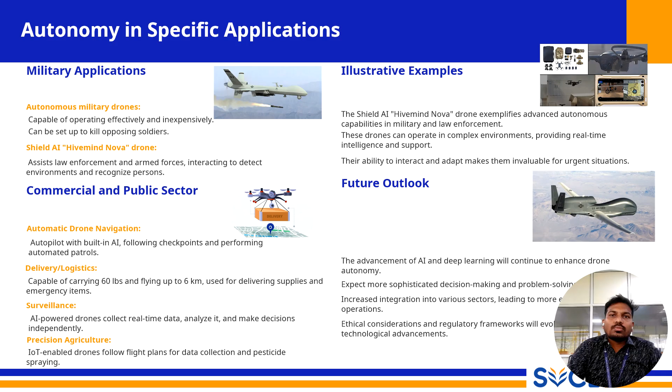Before we delve deeper into multi-rotor stabilization and flight modes, it is essential to revisit two fundamental principles of physics that make flight itself a possibility. Both fixed wing and multi-rotor rely on these core concepts to generate the lift required to overcome gravity. These are Bernoulli's principle and Newton's third law of motion.

As these wings move through the air, the air that flows over the curved top surface must travel a longer distance than the air flowing underneath. To cover the longer distance in the same amount of time, the air on the top moves faster, and according to Bernoulli's principle, the faster moving air exerts less pressure than the slower moving air below the wing. This pressure difference between the top and the bottom surface results in a net upward force, which we call lift.

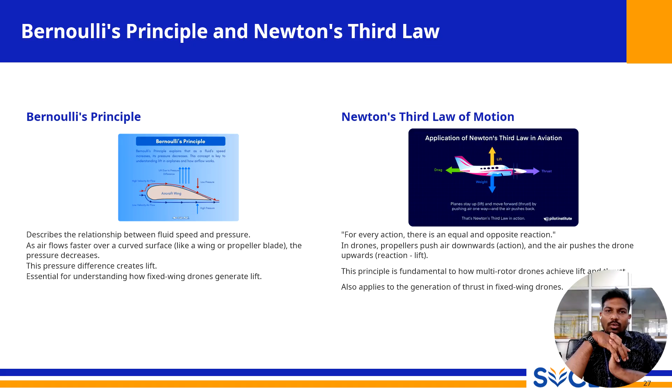It is important to note that this principle also applies to the thrust generated by fixed wing propellers, which push the air backward to propel the aircraft forward. In essence, you can think of a fixed wing drone as using the shape of the wing to create a pressure difference that pulls it into the air, while the multi-rotor drone uses its propellers to push itself up into the air. With these principles in mind, let's now look at how these are applied in the specific design of fixed wing drones.

With an understanding of the core physics, let's now apply these concepts directly to the design and operation of fixed wing drones. Unlike multi-rotors that rely on pure vertical thrust, fixed wing drones are a masterclass in aerodynamic efficiency, using their shape to manipulate airflow and achieve flight. Key to fixed wing drone flight is the shape of its wing, which is called an aerofoil.

As we discussed with Bernoulli's principle, the airfoil is designed with a curved upper surface and a flatter lower surface. This specific shape forces the air to travel faster over the top of the wing, which in turn creates low pressure above the wing compared to the higher pressure area below it. This pressure differential results in the net upward force that we call lift.

Generating lift is one thing, but controlling the aircraft is another. This is where the control surfaces come into play. These are small hinged sections on the wings and tail that manipulate the airflow to change the drone's attitude and direction. To control the drone's roll, or its side-to-side tilting, it uses ailerons located on the wings. To control the pitch, which is the nose up or down movement, it uses elevators on the horizontal part of the tail.

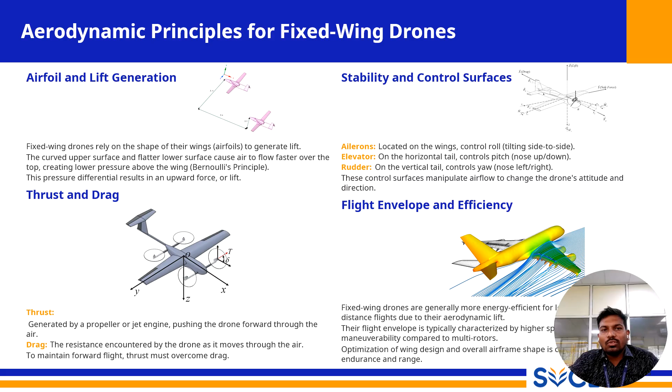On our next slide, we will look at the specific control system that manages these surfaces. We just identified the primary control surfaces on a fixed-wing drone: the ailerons, elevator, and rudder. Now, let's look at the control system that brings them to life. How does a command from the pilot or the autopilot translate into a physical movement of these surfaces to steer the aircraft?

Let's quickly review how each control surface works. Ailerons are responsible for controlling the drone's roll. They work by creating a differential in lift on the wings, which causes the aircraft to bank or tilt to one side. The elevator, which is located on the horizontal tail stabilizer, controls the drone's pitch, or its nose up and down motion. It does this by changing the angle of attack of the horizontal stabilizer.

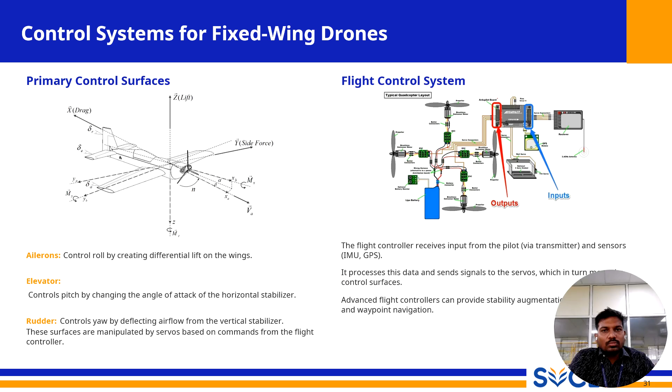This method of using control surfaces is fundamentally different from how a multi-rotor drone is controlled. In our next slide, we will compare this to the control system used for multi-rotor drones. We just saw how a fixed-wing drone uses physical control surfaces to steer. A multi-rotor drone, however, operates on a completely different control philosophy. It has no ailerons, rudders, or elevators. Instead, it achieves all its movement and stability by precisely and independently controlling the rotational speed of each of its motors.

Just as in a fixed-wing drone, the flight controller is the central processing unit, acting as the brain of the entire operation. Its primary objective is to receive and process a constant stream of data from its various onboard sensors. The most important of these is the IMU, or Inertial Measurement Unit, which provides the flight controller with data on the drone's orientation, including its pitch, roll, and yaw, as well as its acceleration.

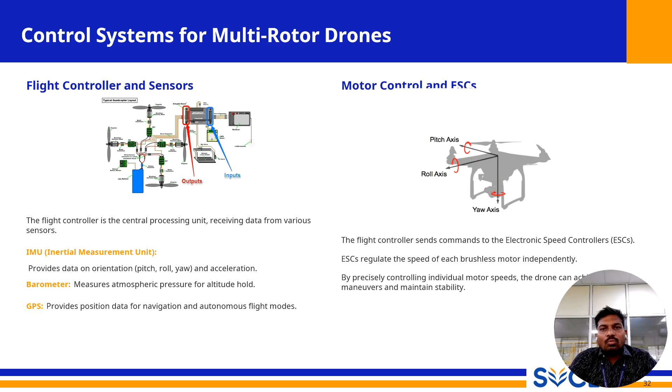It is by making thousands of these small adjustments every second to individual motor speeds that the drone is able to achieve complex maneuvers and maintain its stability. Every movement, from hovering in place to flying forward, is accomplished by varying the thrust from each propeller. While the fixed-wing drone controls its flight by deflecting the air with surfaces, the multi-rotor controls its flight by directly manipulating thrust. This method is less energy efficient but allows for greater maneuverability. This constant process of adjustment brings us to the important concept of aerodynamic stability, which we shall explore in the next slide.

I have talked a lot about how a drone is controlled, but a related and equally important concept is stability. In aerodynamics, stability refers to an aircraft's tendency to return to its original flight path after being disturbed by an outside force, such as a gust of wind. It is a crucial characteristic for both safety and ease of control.

There are two main types of stability we need to consider: the static one and the dynamic. First, let's look at static stability. This is defined by the initial tendency of the aircraft to return to its original equilibrium state immediately after being disturbed. There are three possibilities. An aircraft with positive static stability will immediately start to return to its original state after being disturbed. This is a desirable characteristic for a predictable aircraft.

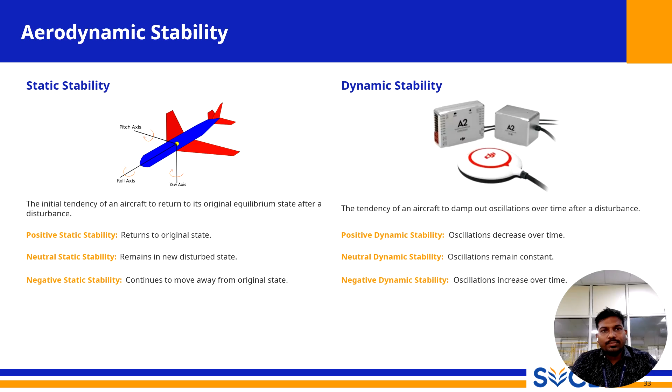We just established that for a multi-rotor drone, stability is provided electronically by the flight controller. This ability to assist the pilot is the foundation of various flight control modes that are available on most drones. These modes essentially determine how much the drone does for you, ranging from no help at all to a great deal of assistance. Let's look at the two most fundamental modes.

First, we have manual mode. In true manual mode, the pilot has direct and unfiltered control over the drone's movement. The flight controller provides no electronic stabilization or assist whatsoever. The pilot's stick inputs are translated into motor commands. If the pilot lets go of the controls, the drone will not self-correct. It will continue along whatever attitude or trajectory it was commanded to follow.

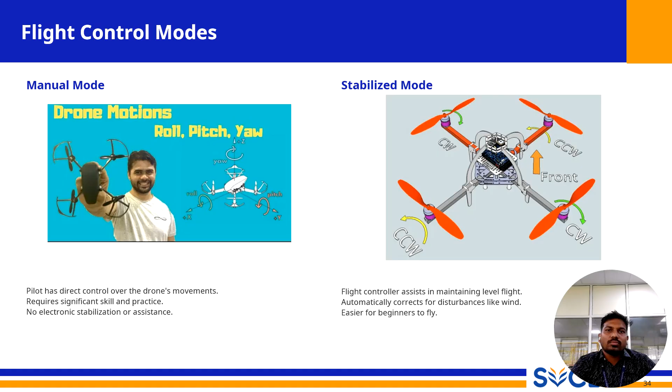We just covered the stabilized mode where the drone assists the pilot by keeping itself level. Modern flight controllers can take this assist even further by using additional sensors to automate more of the flying process. Let's look at two of the most common advanced flight modes, altitude hold and GPS hold.

First is the altitude hold mode. In this mode, the drone will automatically maintain a constant altitude. It is achieved by using a barometer to measure atmospheric pressure or, in some cases, an ultrasonic sensor to gauge its height above the ground.

With altitude hold engaged, the drone manages its vertical position, freeing the pilot to control all horizontal movement. This significantly simplifies the flying because it removes the need for constant throttle movements to keep the drone from drifting up or down. This allows the pilot to concentrate more on the task, like framing a photograph or navigating around obstacles.

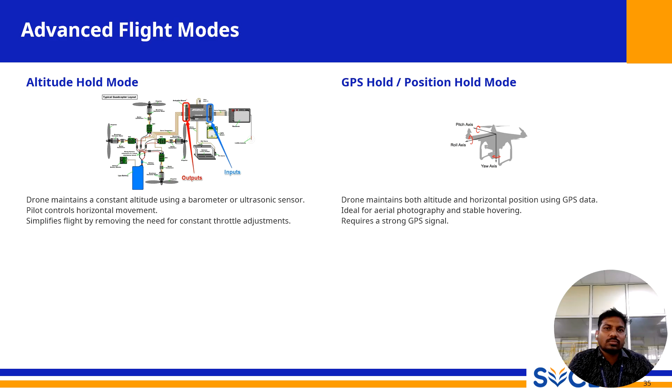We have seen how drones can assist a pilot by holding their altitude and position. Now, we'll take a final step into the realm of true autonomous navigation, where the drone can execute an entire mission on its own from takeoff to landing without any real-time input from the pilot. This is where the drone's full potential as an intelligent robot is truly unlocked.

The most common form of autonomous flight is waypoint navigation. In this mode, the drone can follow pre-programmed flight paths that are defined by a series of GPS waypoints. The pilot typically uses ground control software to plot a course on the map, setting specific points that the drone needs to fly in sequence. Once this mission is uploaded to the drone, the flight controller takes over and autonomously guides the aircraft from one point to the next.

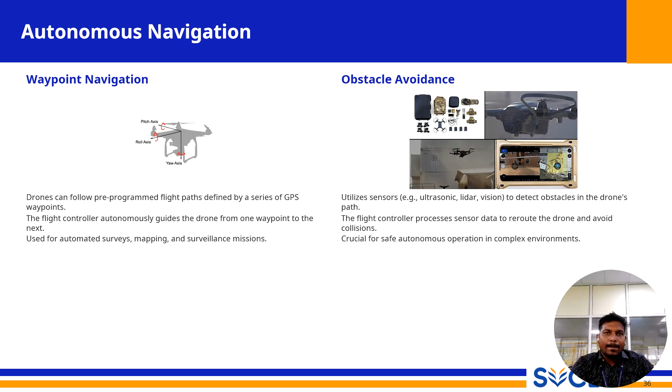We have explored the incredible autonomous capabilities of modern drones. Now, let's take a focused look at the absolute heart of this technology, multi-rotor stabilization. This is the process that allows an inherently unstable machine to hover perfectly still and fly with incredible precision. This is a capability born from the partnership between the flight controller and the inertial measurement unit, or the IMU.

As we established, the flight controller is the brain of the multirotor. Its primary job is to maintain stability and enable precise maneuverability. It accomplishes this by constantly receiving data from the drone's onboard sensors and then sending control signals to the ESCs to ensure the aircraft maintains level flight.

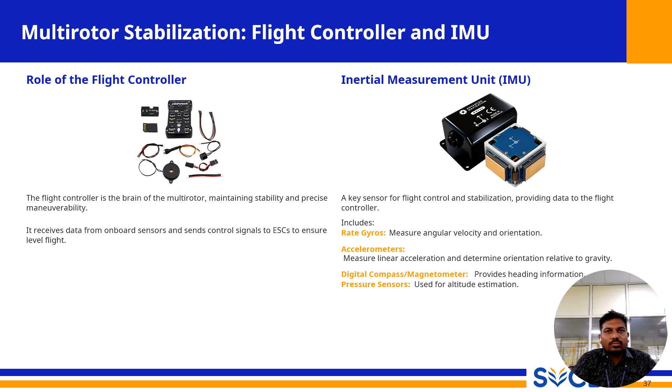We have seen the incredible complexity and the power of the drone's flight controller and its software. But what if the user wants to extend the functionality or create a complex application for specific industrial tasks? This is where the software development kit, or SDK, and the application programming interface, or API, come into play. These are the essential tools that open up a drone platform to a wider world of software development.

Let's start with SDKs. The software development kit provides a collection of tools, code libraries, and documentation that developers can use to create custom applications for a specific drone platform. The primary purpose of an SDK is to simplify the interaction with the drone's complex hardware and software features. For example, instead of a developer needing to write low-level code to control the camera's gimbal, the SDK provides a pre-built function to do so easier. This dramatically speeds up the development process.

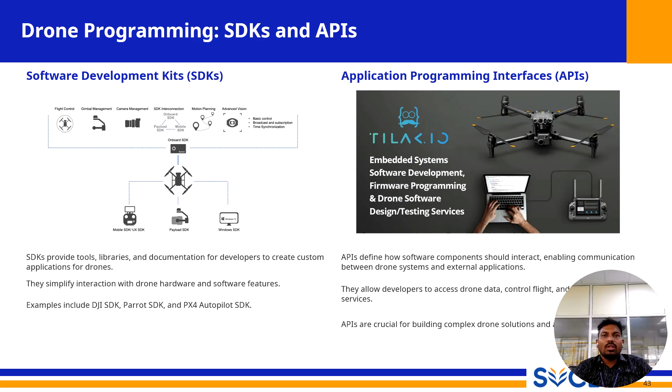Over the course of this unit, we have embarked on a comprehensive journey into the world of drone technology, dissecting these complex machines from every angle. The goal is to synthesize everything we have learned, weaving together the distinct but interconnected topics of classification, hardware, fabrication, autonomy, and flight mechanics. We'll revisit the essential concepts, from the broader categorization of unmanned aerial vehicles to the specifics of their remote control operation, creating a holistic picture of how a drone is conceived, built, and flown.

We'll start by reviewing how drones are classified and the essential parts that make them up. Drones or UAVs are broadly classified based on several key characteristics, including their weight, size, and physical configuration. These configurations primarily include fixed-wing drones, which rely on aerodynamic lift like an airplane, multi-rotor drones, which use propellers for direct lift, and advanced hybrid designs that combine these features, such as vertical takeoff and landing, or VTOL.